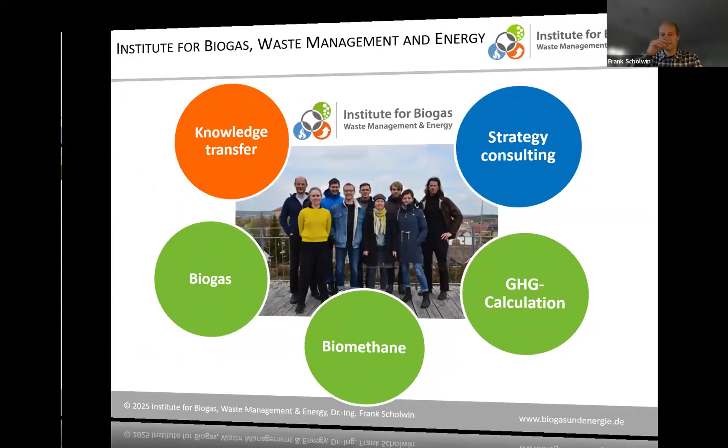Yes, thank you very much. I will share my screen for you because I have prepared some slides, and it's a pleasure for me to contribute to your workshop series with some of my knowledge. I hope that everything will be well understandable for you, because I'm not a native English speaker, but I will give my very best today.

I will give you some insight into the biogas process and technology, with the background that we can use it for utilizing organic wastes, organic residues, and produce energy out of that. This is something where we have a lot of experience and where I have been working for more than, what is it now, almost 25 years.

I am working here, as you have heard in the introduction. With my 11 colleagues, I'm working especially for biogas plant operators, helping them with all technical issues, with questions for strategy development for new plants and existing plants, and we calculate greenhouse gas emissions for them.

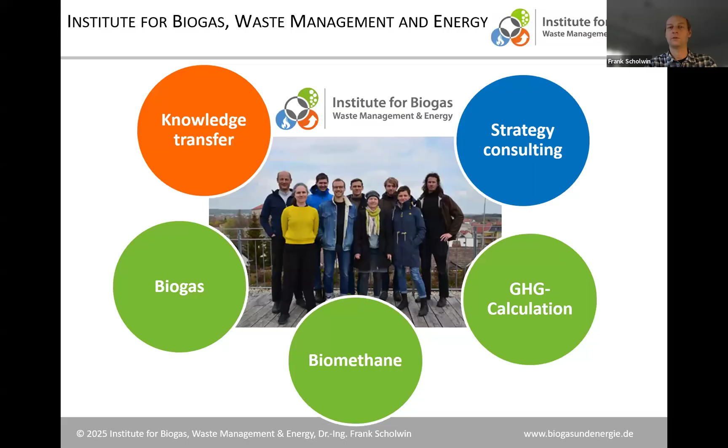So there is a very deep knowledge base about biogas where I want to try to give some insights for you all, what that means. If you have questions, please share them in written form, I think it's the easiest way. Before each of the breaks, I will give the floor for discussion, just to answer your questions and take up probably some of your thoughts.

Because, just to be honest, I'm mainly working in Europe. I have seen plants also in South America and Asia, but the focus of our work is Europe, and I know that the conditions here are sometimes very different compared with conditions in other countries and other regions of the world. But the technical processes and the biological process for sure are the same everywhere, so I am convinced about that at least.

What is biogas? Just starting with that, because my lecture today will be on the basics. I hope that you will not be disappointed because you know everything already, but that's how we designed this presentation, to start with the basics, and probably go into some deeper questions also within the questions you have.

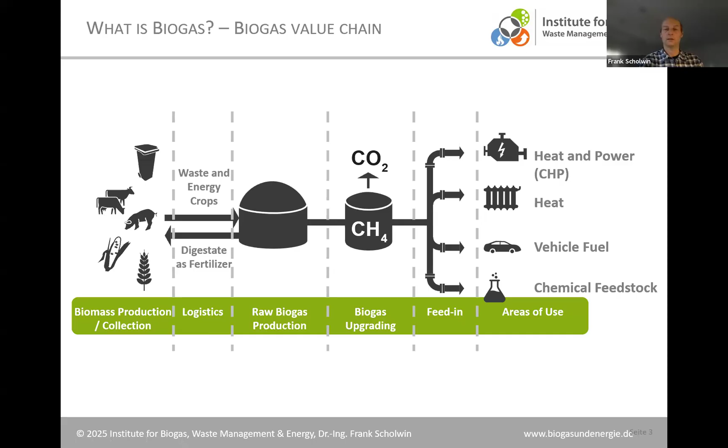And that's what I want to speak about for the next 2.5 hours, something like that. But that's the overall picture of what we will speak about.

When you want to investigate that a bit more in pictures and movies, there's a lot available on YouTube. There I think it's a very good overview which you can also get from the European Biogas Association. When you click the link - I will not do that now - you can watch a video of how the process is organized and what the basics of the process are.

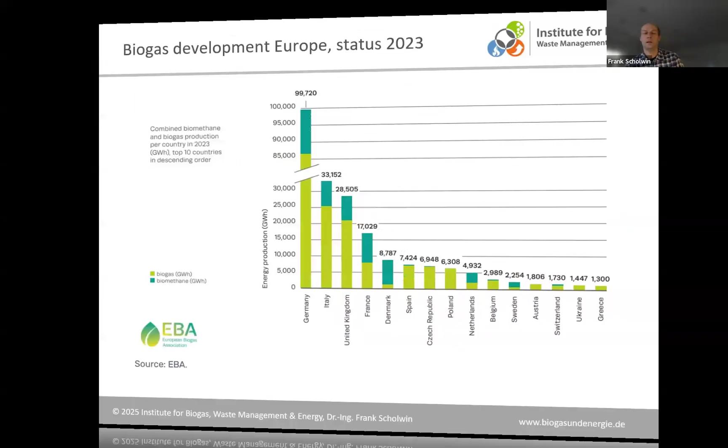I can only encourage you to look at a lot of videos, some painted like this one, highlighting the main points, but there are also a lot of videos about practical plants, so you get an impression of how the process looks in practice in different sizes. That's something I want to skip, but you will get the slides and can use this link. As a first part, I want to speak a bit about the development of biogas production.

What did we achieve until today, and when did it start? Not into the very deep history of biogas production - then we would go into wetlands. In wetlands the process practically takes place, and it also practically takes place in a cow's stomach, where these so-called anaerobic microorganisms are also active.

But I want to look a bit more at the industrial history. It's more or less 120 years ago that the first inventors saw, oh, that's a process we can make use of. In India, for example, street lighting was processed with gas, and that gas was produced from sewage sludge around 100 to 110 years ago. But today we are speaking about more industrial-like plants.

Here you see, when we only focus on Europe, where do we have most biogas production? That's a unit of energy production - how much biomethane and biogas is produced in the different countries, in the status of 2023. That increased a bit again, but the general picture is the same today. Italy and France will more or less in the near future overtake Germany, but still it's the highest biogas production in Germany.

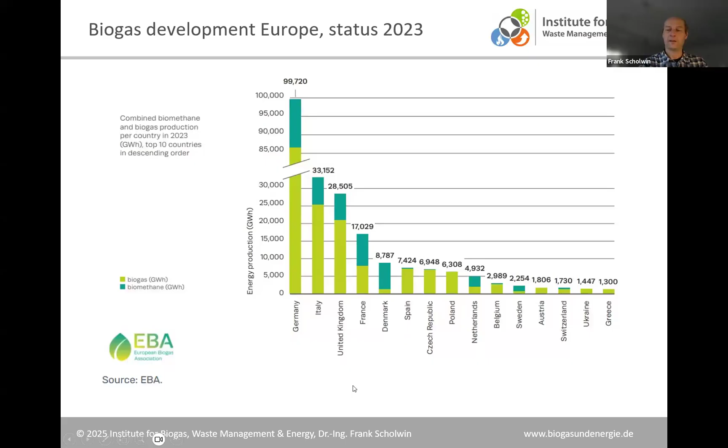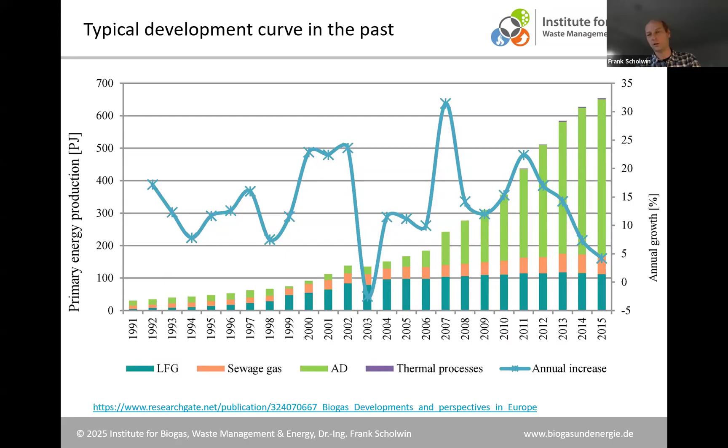And therefore it needs some type of incentives, and there are a lot of different incentives which are possible. When we see investments into biogas production, it's important to have some incentives. That can be tax reductions, direct incentives and money coming to the producers, in very different ways.

That's probably some numbers for introduction. In Germany alone we have around 10,000 biogas plants, which is probably nothing compared with India or China. But in those countries we have a very huge number of very small family-sized biogas production units, whereas in Germany the biogas production is typically more industrial scale -- there's no family-sized biogas plant.

It's all industrial technology with a larger scale. The smallest biogas plants we see use around 5,000 tons of manure per year, or 5,000 cubic meters of manure per year, and that's clearly not family sized.

On the international level, we have in Europe the highest numbers, but it's not necessary to have them here -- it's probably also connected with incentives we had in the past, because the advantages from biogas production are more or less the same everywhere in the world, and the substrates, the biomass we can use for the biogas production process, are more or less available everywhere, not only in Europe. Therefore I have collected a bit the advantages related to biogas production.

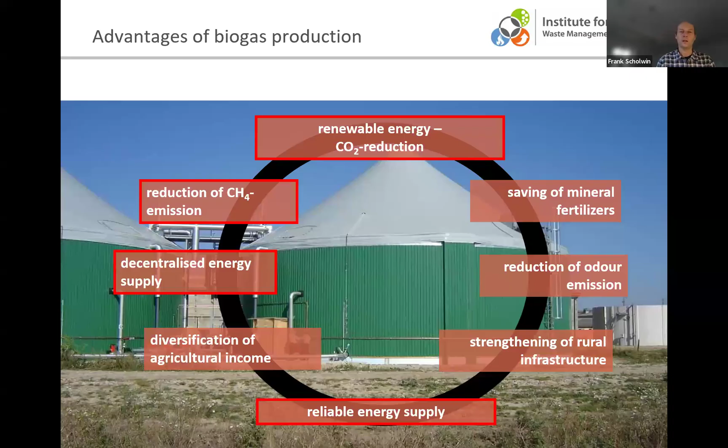So, leaving these general questions around the biogas process here, I will move on to more details of the process, starting with the biological process. But I will give you the floor if there are some questions, just raise them. I will leave this topic now and take a short break.

There is a question in the chat, I think from the second or third slide, about the typical development curve you showed us. The question is: why is the production of LFG almost the same after the year 2004? Does it indicate a limitation of production, or is it related to sustainable production of the LFG?

That's a very typical European question, because in Europe we had the introduction of the so-called landfill directive, around 2004 or 2005, on the 1st of June 2005, which banned the landfilling of organic waste in all European member countries. After 2005 there were more or less no incentives to extract more landfill gas, because no organics came into the landfills afterwards. Therefore we have this flat curve, because more or less all larger landfills already had a landfill gas collection system before, and only very few were installed afterwards. After that act, the focus of companies building landfill gas solutions shifted always outside European Union countries.

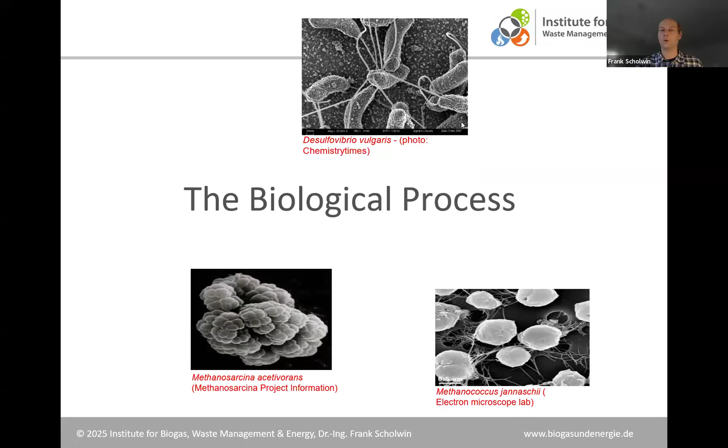I will switch to the slides again, but let me give a small answer to this question, because I cannot really explain the IPCC model, how it works, and I don't know if there's an open source model. I assume not, because they try to earn money with their work. That's my impression, and that's a good question, but I have to leave it open.

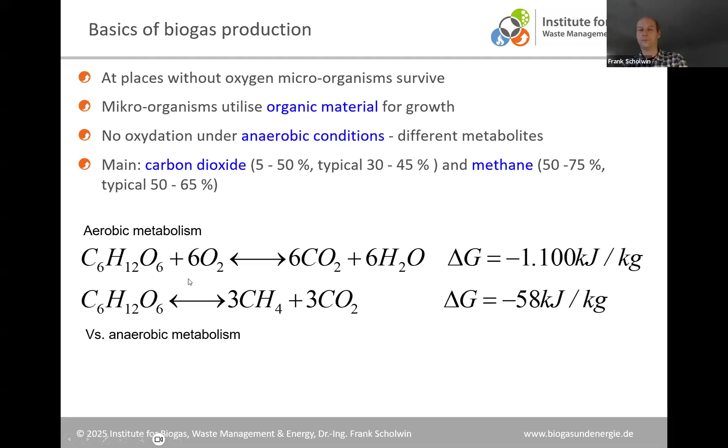So moving forward, the microorganisms - these are the conditions you have to realize as the engineer for the plant. You have to keep in mind that the microorganisms are your employees finally, and you have to create the best conditions for them so they like to work for you. They don't get paid, but they need to have fun working. They need certain conditions, and these conditions are collected here.

They need water, so at least 50% water in the process, and that's just dry. They also like it when it's liquid. It must be anaerobic.

Many of the microorganisms are strict anaerobic, so that means if there are some traces of oxygen available, then they stop working. Therefore, we have to keep the microorganisms in a covered tank, some kind of tank.

They like it to be warm. That means they need temperatures anywhere between 38 degrees Celsius, like our stomach, for example, or the cow's stomach, up to 55 degrees, sometimes a bit higher, but that's the range where they like to work.

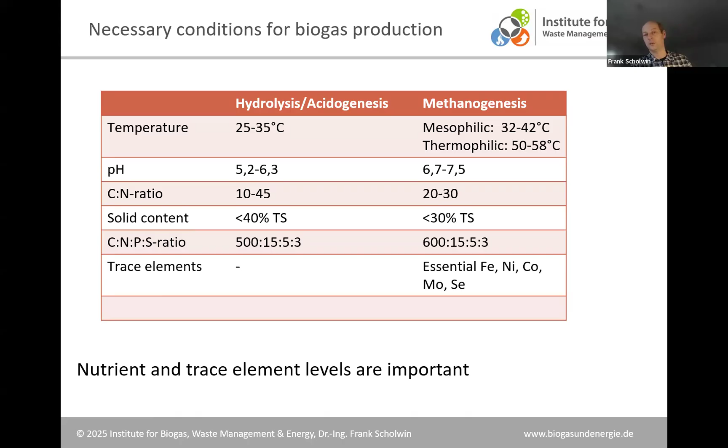Then there are some conditions which will result in an inhibition of the biological process, and that's availability of oxygen, what I sometimes told now.

But then it's also hydrogen sulfide, H2S. If we have too much H2S in the solution, that will inhibit the microorganisms from working. Therefore, the H2S must get out of the process, or sometimes you have to add additives to reduce the H2S concentration in the liquid in a biogas plant. Then volatile fatty acids, they are produced in the so-called acidification process, the first step of degradation.

And if they increase over this limit of around 2000 milligram per liter, then the methanogenic bacteria reduce their speed and their working time, and therefore the biogas production will be reduced. So we have to take a look on that, and there are some laboratory analyses you can do on site at a biogas plant.

That's possible. The same with ammonium nitrogen, where we also have to take a look. That's, for example, a challenge when we only have chicken manure. Chicken manure contains very much nitrogen, and when we want to process chicken manure only in a biogas plant, it's more or less impossible because you have very, very high ammonia levels in the process. Then you need some additional technology to take out the ammonium from the process, to reduce it below 3.5 gram per liter NH4.

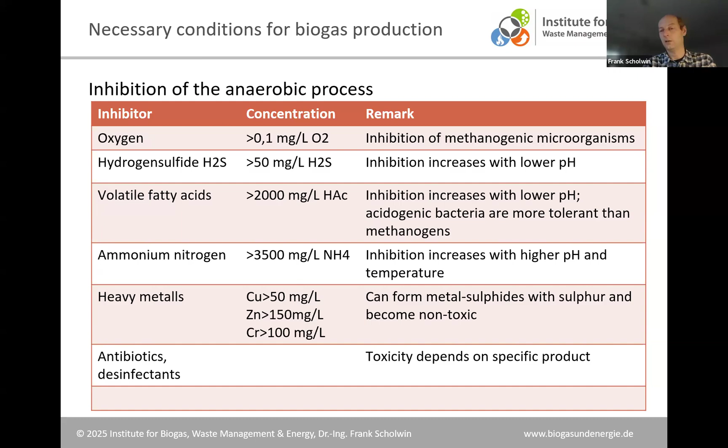Then we have some heavy metals, which can damage the microorganisms, and additionally antibiotics and disinfectants. So that's to be considered when you should be one day operator of a biogas plant, and then it could get important for you.

And then we have two other factors which are also important for the final design of a biogas plant, of the digesters, the tanks of a biogas plant. There's the so-called hydraulic retention time and the organic loading rate. I will only touch on these two factors today, which impact the behavior of the microorganisms, because the microorganisms need time to duplicate.

They need to get more and more into your process, and they need time for that - at least 14 days, I would say. If you have a process where the so-called retention time is less than 14 days, then you will wash out the microorganisms, and finally you will have no microorganisms, or very few, back in your system. The retention time means how long it takes for a piece of substrate coming into the biogas plant to come out again on the other side.

That's impacted by a lot of factors - just what hydraulic retention time do you choose? It's dependent on how degradable the input material is, what you use in the biogas process, and what kind of digester type you use. I'll come to that a bit later.

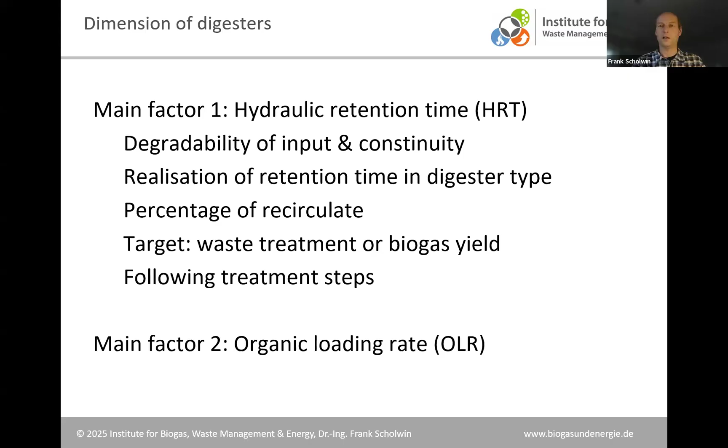That's probably some issues regarding dimensioning of fermenters and some typical times here. Typical retention times is when we have a so-called discontinuous process, that means, or plug flow as we say, that a substrate comes into a fermenter and then it stays controlled for a dedicated time in the fermenter or digester. And then it needs typically 21 days at least in the fermenter.

But when we have a CSTR, that means completely stirred tank reactor - a reactor that is totally mixed and continuously fed, every day feeding or every hour feeding, and every hour some digestate comes out. Then you have always a full mixed system, and you have always the challenge that fresh material will more or less directly leave the digester again. Therefore, in this type of plant, we need a longer retention time, typically between 30 and 100 days.

So if 1 cubic meter of substrate comes into the digester, we need a volume between 30 and 100 cubic meters that we can guarantee with 30 to 100 days retention time.

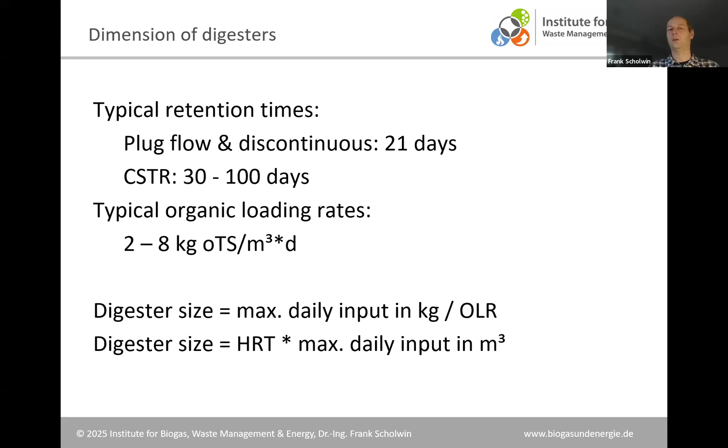And typical organic loading rates, we always calculate with the organic dry matter, ODM. There we have 2 to 8 kilogram organic dry matter per cubic meter digester volume and day in the feeding, and that works quite well. Out of these numbers, we can calculate the necessary digester size, and out of the digester size, finally, it results the investment - what does it cost to build this biogas plant. So we have this relationship here for the digesters.

And then I make a switch to what comes out of the plant. I mentioned it earlier - we speak about methane and carbon dioxide mainly. Methane is what we need for energy purposes because methane is burning. Natural gas is typically consisting of 97 to 99% methane, with some other trace gases, but mainly it's methane, and that's what we can substitute with biogas.

But what we additionally have, besides methane and carbon dioxide, is water vapor, because the process is typically 38, 40 degrees, something like that. Therefore, water is evaporating in the system, and that's something we have in the gas. Therefore, we have typically very much condensate in the piping systems for biogas, and then we need some technology to separate the condensate.

Then we have hydrogen sulfide, because sulfur is always contained as a trace element in the substrates. Typically we have concentrations in a very wide range, between 20 and 20,000 ppm, so up to 2% of the gas. That depends really on how much sulfur is in the substrates. We have very much hydrogen sulfide, for example, from chicken manure or from pressed or squeezed rape seeds - there's a lot of sulfur inside.

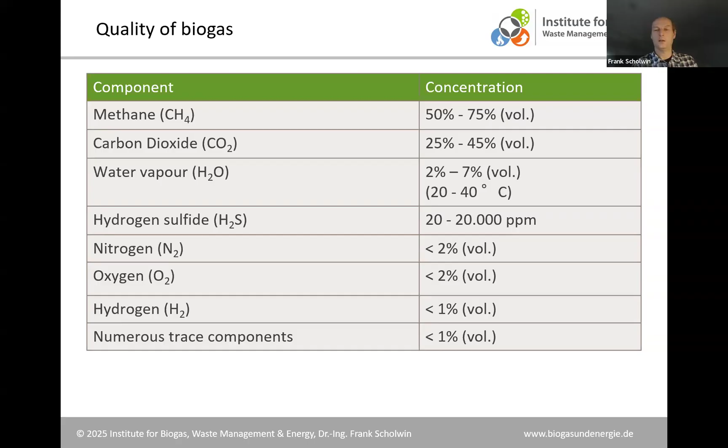So finally, with the substrates we use, we define the composition of the biogas. That's very clearly related and can be finally also calculated. And then, after a break which I would take soon, I would come to the questions of which kinds of substrates we can convert and how we can calculate the amount of biogas.

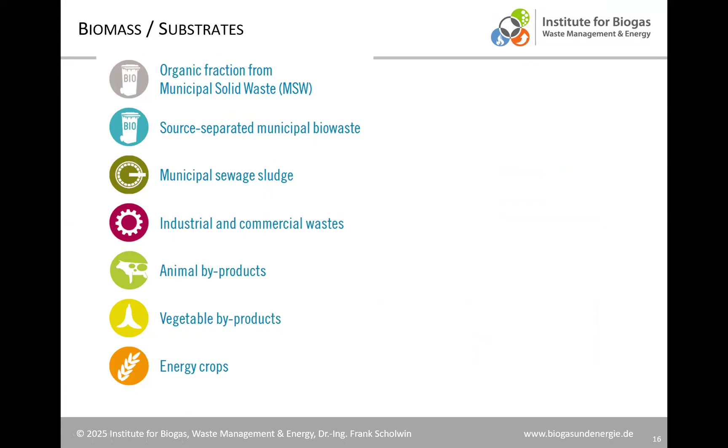Now it's a question of what kind of biomass can really be used and what percentage of biomass will finally be converted into biogas. There's a very long, more or less unlimited list of possible substrates which can be used, starting with the organic fraction from municipal solid waste, or source separated municipal bio waste, industrial wastes, sewage sludge - it's very common. Commercial wastes from food industry, for example - almost every food industry has wastes which can be used for biogas production.

Then there's a lot of animal byproducts - manure, straw, bedding from the cows, everything coming out of that. Then vegetable byproducts - things that are leftovers from processing food, for example. And finally, last but not least, I would say, energy crops.

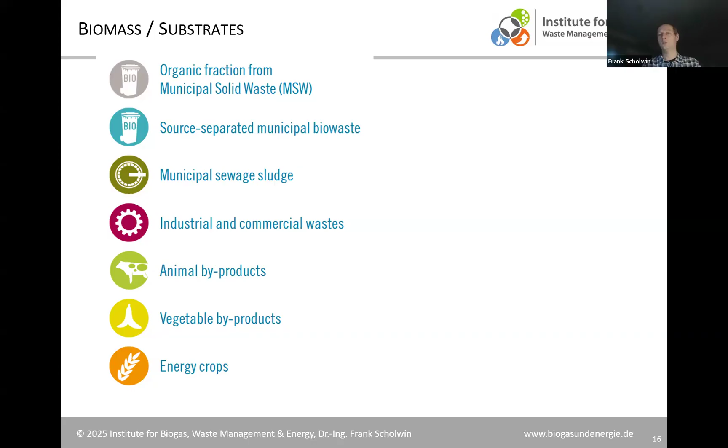Energy crops are used to a very large extent in Germany, and they can be used, especially when they are ensilaged, just to fill gaps when there's not enough other organic material available, so that you have a continuous production of biogas in your plant. That's just a short overview, with some pictures of how it could look like.

One example here you see is more or less wood waste. Wood waste is not possible - the anaerobic microorganisms are not able to eat wood, so wood chips are also not possible to be converted. That's a limitation.

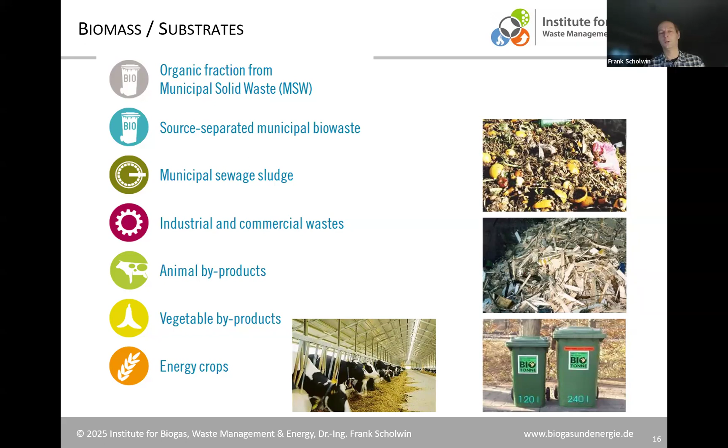When you want to analyze that, you can dry your material in an oven at 105 degrees, for example, until you have a constant weight. Then you can evaporate the water, and from the weight difference in your oven, you can measure how much water was inside. Then you can put the rest of the material into an oven at, I'm not really sure, 700 degrees, something like that.

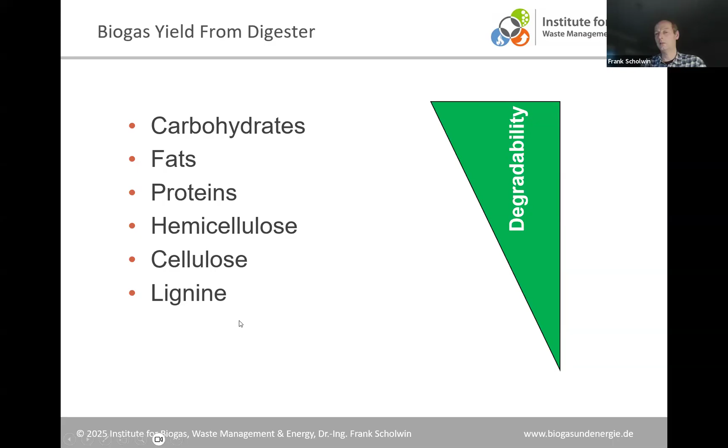There are some specific questions around municipal solid waste, because we cannot easily take a number from a table, as it's very, very dependent especially on the percentage of the organic fraction in the waste. Worldwide we see very different numbers for the organic fraction of waste. Sometimes people have composting close to their houses, so we have very few amounts of organic fraction in the waste. Sometimes they live in the center of town and put everything organic into their waste bin, so the percentage is quite large.

Then we have some seasonality, which depends a bit on the climate where you are located. For Middle Europe, we have very strong differences between winter and summer - summer when people are in the garden producing their own vegetables, winter when nothing is growing. Or you have very dry and rainy seasons, with very clear differences, including differences in quality, not only in amount, but also in quality of the waste you collect.

And it's also always a changing composition of the organic fraction. Sometimes it's much wood inside, or from gardening material. Sometimes it's only food waste.

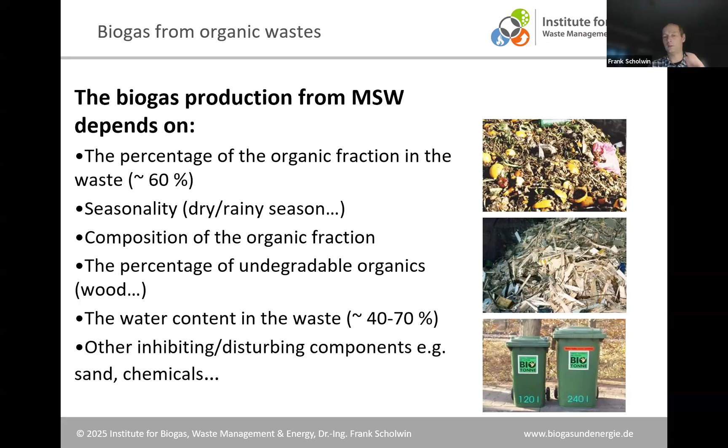And then it's also changing water concentrations and some other disturbing components that you have to consider when you are making a plan for a digestion plant for organic waste. That's something I only wanted to put your attention on here.

Now I will make a small calculation example with you so you get an idea how to calculate how much biogas can be produced from a dedicated amount of substrate. I take two examples, one organic waste example and one cattle manure example, and I take quite large numbers, just for a larger town, I would say, with 500,000 inhabitants.

Then you can expect around 50,000 tons per year of source separated organic waste. When I'm just looking at Germany, it's like close to Leipzig or Dresden. These towns will have such an amount of organic waste.

Then as a second example, I have cattle manure, where I take 10,000 tons per year. That's not so much. That's from, for example, 500 cattle at one stable or one location. So it's much less.

And then we have different numbers of fresh matter concentration. So in organic waste, that's only an assumption - it will be locally different, but just for a calculation, we have 40% dry matter, and the volatile solids, so the organic dry matter, is 50% of the solids. And so we can calculate that out of 50,000 tons per year waste volume we get 20,000 tons dry matter, and half of that is organic dry matter, what can be converted to biogas.

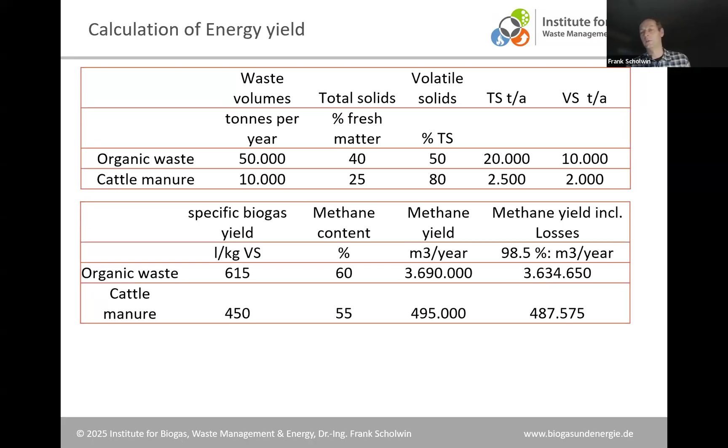And out of the cattle manure, because we have much less organic matter and much less specific biogas yield and less methane concentration, we only have 500,000 cubic meters methane per year. And then there are typically some losses in the process, which we calculate typically with 1 to 1.5%. That must also be considered. Then we result in these numbers here on the right-hand side.

And then we have to think about what we will do with that. Typically, you don't sell the methane - it's also possible, yeah, but typically you need some energy, and that can be electricity, that can be heat, or it can be gas to substitute natural gas. That's what I put here in the lower lines.

So we have in these gas amounts here the energy yield, lower heating value, shown as megawatt hours per year total. Here we have that's around factor 10, yeah, factor 9.97 is the correct factor. Then we have 36,000 megawatt hours out of the organic waste, or around 5,000 megawatt hours out of the cattle manure.

And when we produce electricity, we have typically 40% efficiency. Then we can have here 14.5 thousand megawatt hours electricity, or only 2,000 megawatt hours electricity in the cattle manure case.

And when we produce electricity, typically we produce electricity and heat. So in a motor, the biogas is processed in the motor - I'll come to that later. There's always some waste heat, and then we have around the same numbers of heat that we produce.

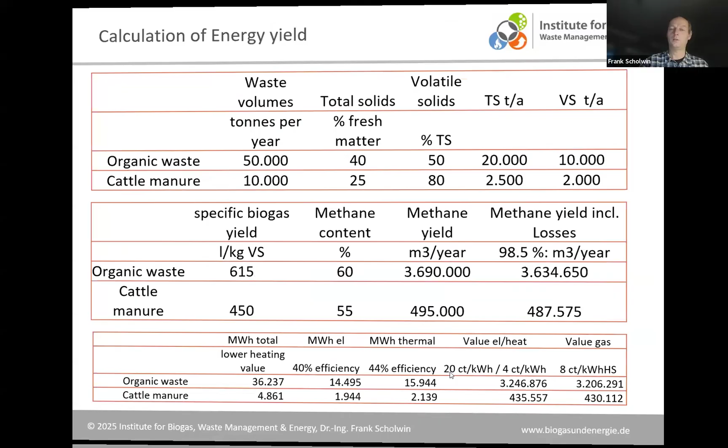If we sell the gas instead, to substitute natural gas, which is possible when you have a gas grid where you could inject the gas, then it's around the same numbers. The final economy depends on these individual numbers: the 20 cents or 4 cents for heat, 20 cents for electricity, or 8 cents for the gas you sell. Then you need an optimization of what you can sell at that location, depending on the energy produced there.

So that was quite fast, and I would open the floor if you have some questions. I see there are a few questions in the chat. It's more of a comment, so I'll start with the first question, including some elaboration.

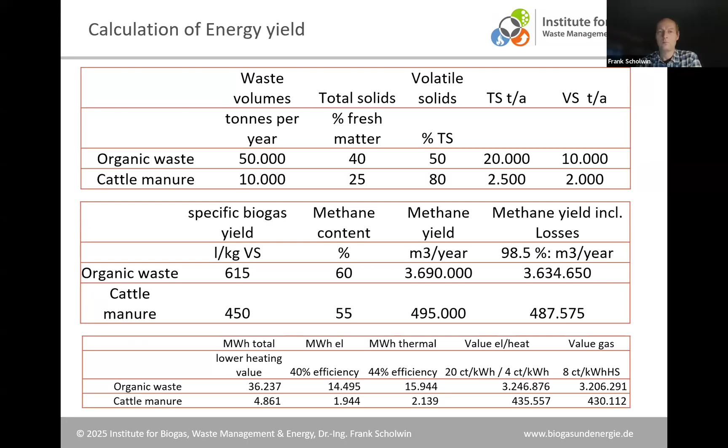The total solids based on fresh material, volatile solids, and also information like specific biogas yield, methane yield, and lower heating value - these we can find in resources on the internet. So for clarification, in each of these slides, or in this table here, you will have that available, but such tables you can also find on the internet.

Do you suggest any specific source that has better international data? I know there is a very good database for German-specific data in Germany, but is there any dataset or source for the rest of the world that people can look into? Very good question - I am not aware of that because I only use the German ones, and I cannot suggest a good international site or web page where you can look for that.

Another possibility is to do sampling and check it in the lab to see how much volatile solid and organic waste there is, and so on. Yes, but you need a lab that is able to produce these numbers. In Central Europe it's very easy to find laboratories, but I know in some other countries there are not so many specialized laboratories. It's also an option for industrial substrates that don't really fit in such a table - then it's probably best to check the biogas potential of that individual substrate in the laboratory. I know people from some other countries send their samples to laboratories in Europe or Sweden to check the potential.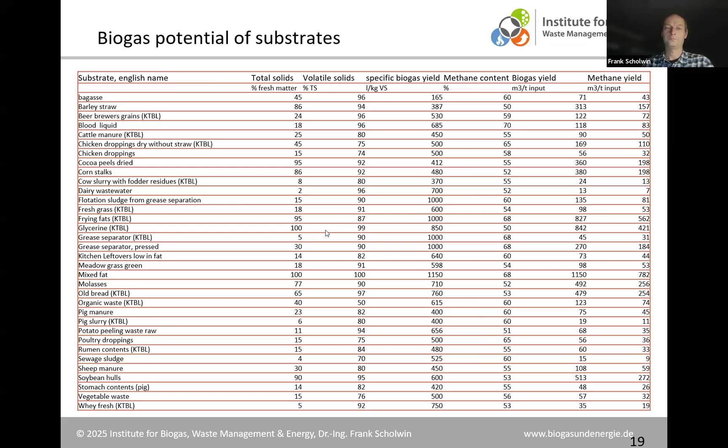Okay, then I would proceed with the technological process. What you see here, I will go through the process from the beginning to the end, more or less.

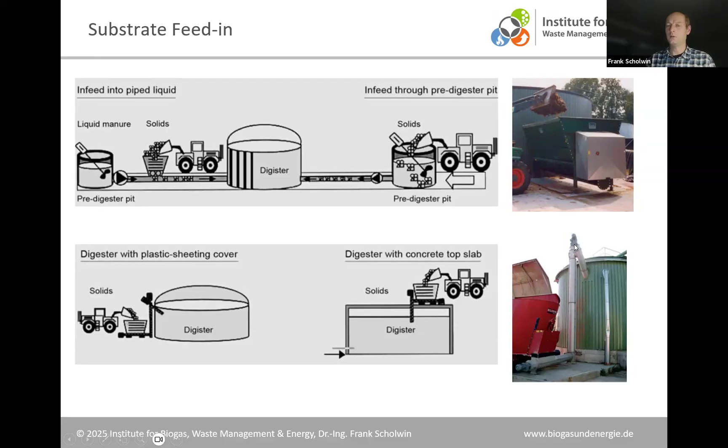Sometimes it comes underground, as in the upper picture, or it comes over the surface, where solid material is fed into a feeder and screws transport the material over the surface, coming from above into the digester, or the digester is underground and fed directly from upstairs. Some different methods - on the right-hand side upper picture, solid material is fed with a screw going directly into the digester behind the feeder. In the lower part, you see a system of screws transporting the material upstairs and then downstairs again into the digester.

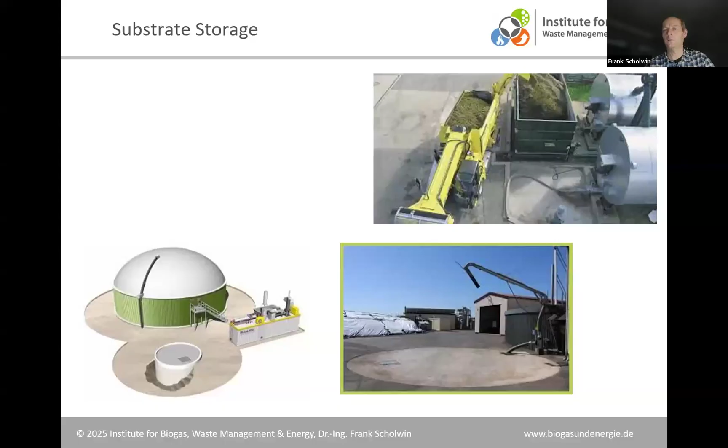When the process is getting wetter, with less dry matter concentration, then it's possible to mix it totally, like in a mixer when you are preparing a smoothie or something like that. The material is coming in on one side, leaving on the other side, but in between it's totally mixed. And that's very liquid.

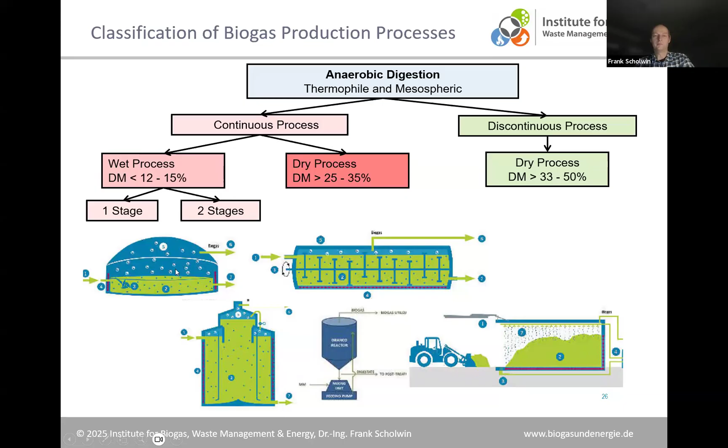There are very many different technologies available, what I will not speak about in detail today - just giving you an insight and an overview of what technologies we have. And now some pictures, just that you can see how it looks like.

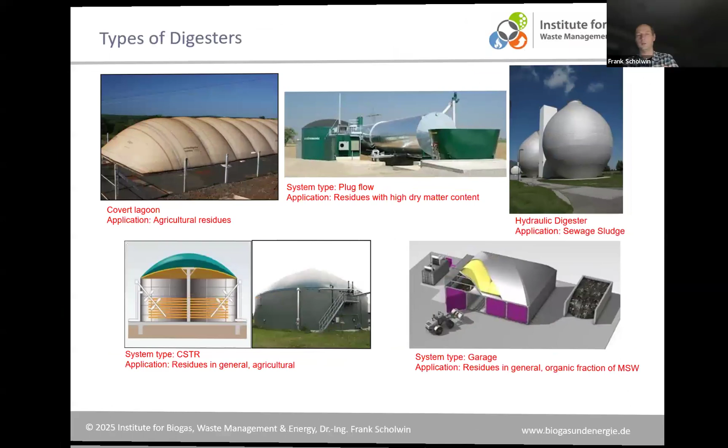A biogas plant can be a lagoon, what we have seen often in South America, where we have a gas-tight cover on the ground. Here it's more or less dug into the ground and sealed with some foils or with concrete - there are different options. And then there are mixers inside.

Then we have this plug flow fermenter, like you have seen also earlier, where the material is fed on one side, taken out on the other side. Then there are digesters which are optimized for hydraulic mixing, what you see only in sewage sludge plants, in wastewater treatment plants.

This is a very, very special form, like an egg, so you have no dead zones of mixing, what you always have in these other fermenters. The typical system you would see in Germany is a complete stirred tank reactor, where we have mixers inside, and a tank where the material is continuously fed, more or less every day or every hour.

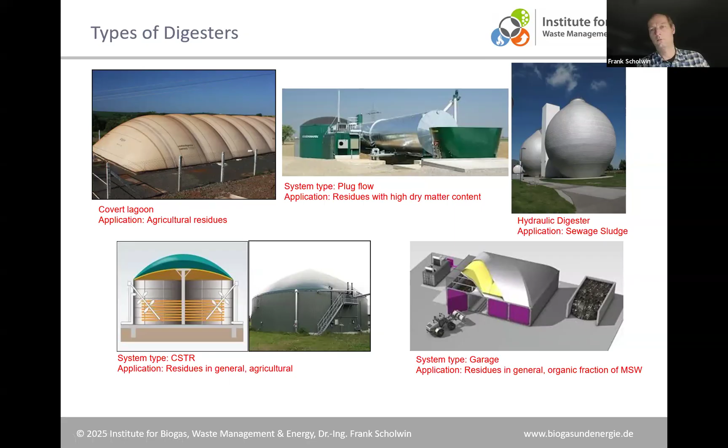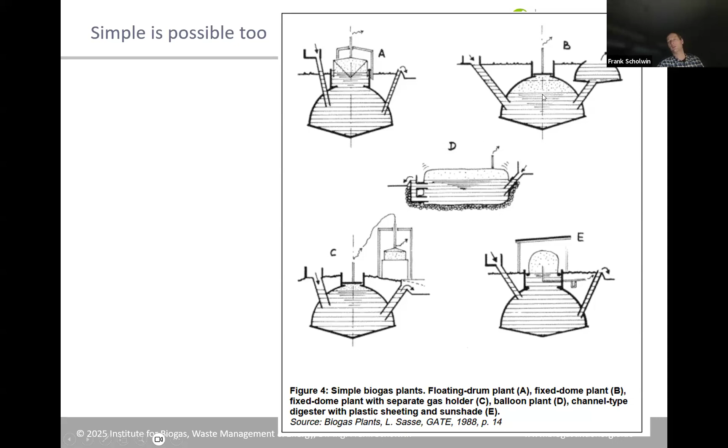But it's only working in very hot climates, because the process, what you have learned earlier, needs some temperature to have a good running process - 30 degrees, more than 30 degrees, what you hardly can realize in these systems here. And when we are coming to a climate zone which is colder in winter, then these plants will not work in winter.

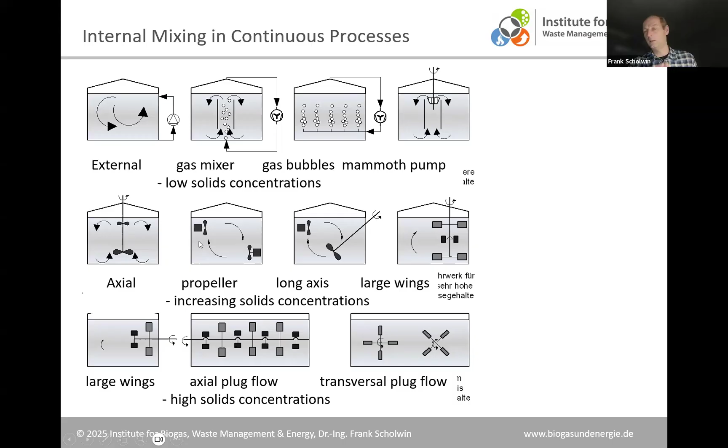You can also use a pump outside, so then you have no mixers inside, which is good for maintenance. And you can also mix the digester inside. That's a lot of options for how you can do that.

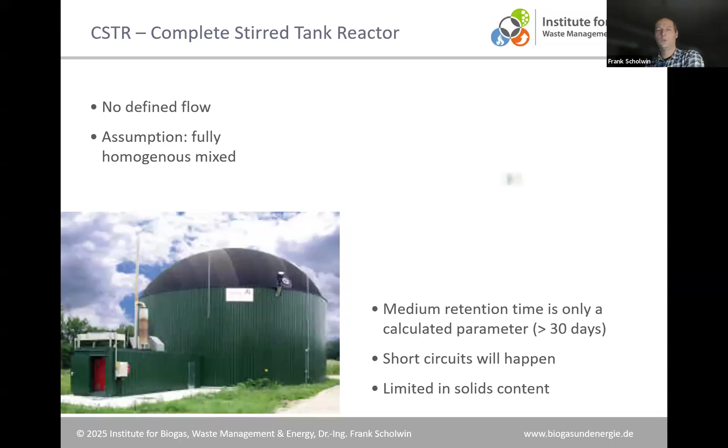I think some pictures are coming which will add some views, but I will skip these. That's because we are speaking mainly on municipal solid waste here in this workshop series.

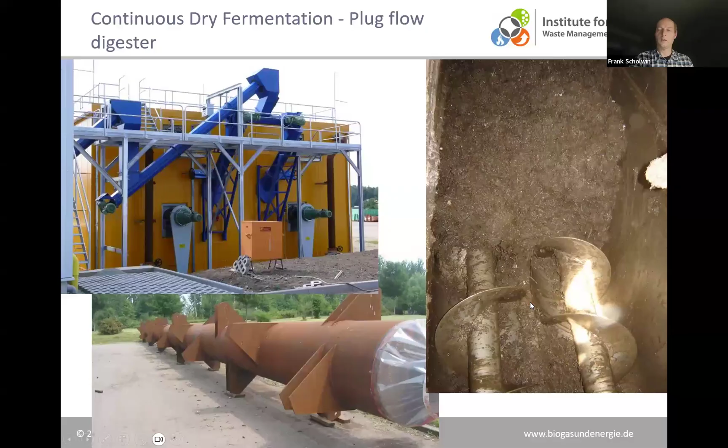Yes, that's more or less the same, and I would skip these. So everything is possible in large scale.

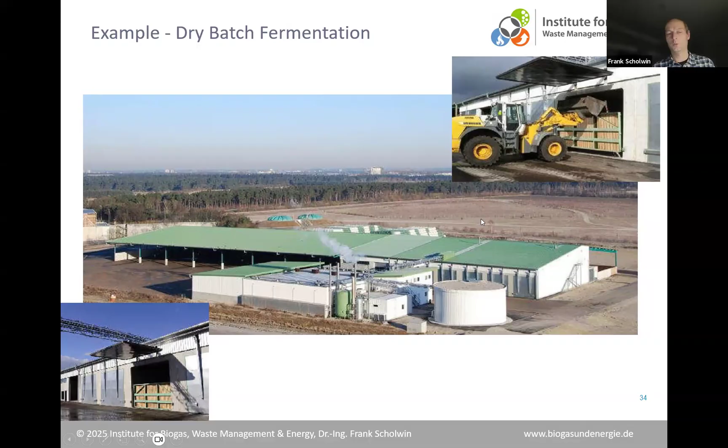So one is filled and the others are under the digestion process. If the digestion process ends in one of the others, they take the material out and fill it with new material. That's how these systems work.

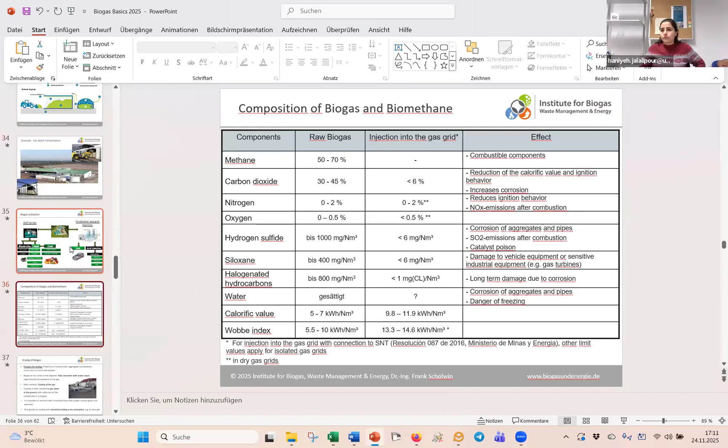So I think we can proceed. Okay, so now I will come to the last part, when the biogas is produced, and I tried to explain you the technology and the process until this point. Then it's the question, what should we do with the gas?

There are some options, I mentioned them in the beginning. One very typical case in most regions of the world is just to produce electricity and heat on site of the biogas plant, in typical gas engines or ignition oil engines, where we can cover local demand of electricity and heat, or bring the electricity into the local or larger electricity grid. In the case that we don't need the heat, it's possible to produce cold, which is also necessary in many buildings and in some industrial cases. And if no electricity is produced on site, one option is also always to produce only heat - what I don't see in the regions of most of our participants here.

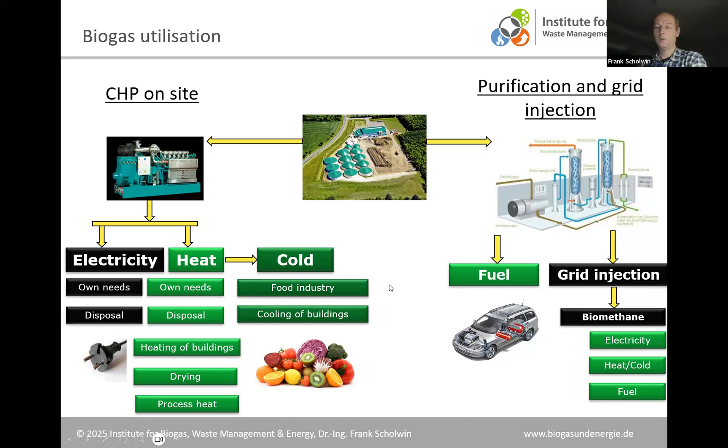But one option is always to purify the gas, to upgrade it to natural gas quality. That means to take out the carbon dioxide and use it as a fuel, or to inject it into a natural gas grid. This happens - I can only estimate 3,000 places in the whole world at the moment - and that's also a typical way how to use the biogas. I will explain some of these pathways a bit more in detail.

Here you see the composition of biogas and biomethane. Biomethane means the biogas that is upgraded to natural gas quality. In the biogas, we have a lot of methane, clearly. In the gas grid, that's more or less the limits - not a composition, but the limits when we want to inject the gas into the natural gas grid. For methane, there's clearly no limitation, but for carbon dioxide, we must reduce the concentration to lower than 6%. The nitrogen must be brought down typically to 2%.

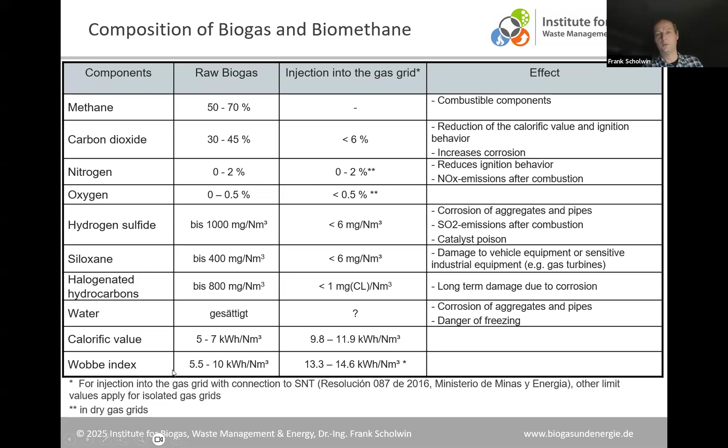The oxygen must be down to 0.5%, something like that. Hydrogen sulfide must be reduced very strongly, from typically one or a few thousand milligrams per cubic meter down to 6. We also have other components - siloxanes, hydrocarbons, water - that must be adapted and reduced. Then there's a difference in calorific value: raw biogas is 5 to 7 kilowatt hours per cubic meter, while natural gas is much higher due to the absence of carbon dioxide. The same applies to the so-called Wobbe index, a parameter of gas quality in natural gas grids. We need technologies to bridge this gap.

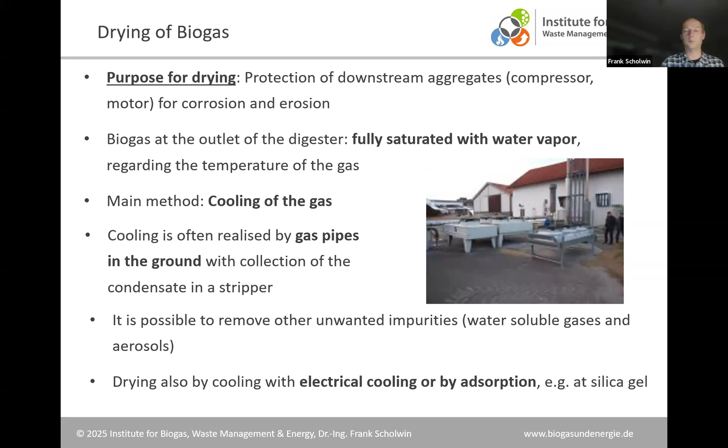The first step is always drying the biogas, because we have to protect all aggregates against corrosion. The biogas is saturated with water vapor, coming out of the digesters at around 48 degrees. Drying can be done by cooling the gas, producing condensate that separates the water from the gas. This is typically done with electrical cooling, but sometimes adsorption is also possible. It's a very important step.

The second step is removing H2S from the gas through desulfurization. There are many possibilities to do this. It can be done using microorganisms in the digester, where we add a small amount of oxygen into the gas phase of the digester - not the liquid phase, the gas phase. Microorganisms then convert H2S into sulfur, and everything gets yellow inside the digester.

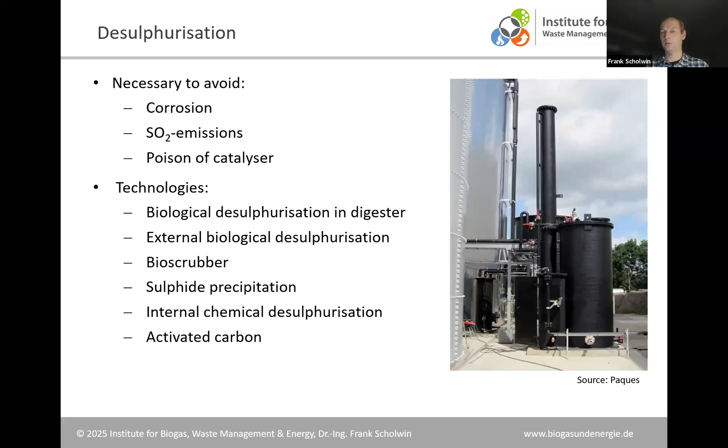This can also be done externally, like in the photo here, in so-called bioscrubbers. We can also use chemical pathways, or finally activated carbon, where the gas flows through activated carbon and the H2S binds to it - though this is typically the most expensive solution. Often a combination of different technologies is used.

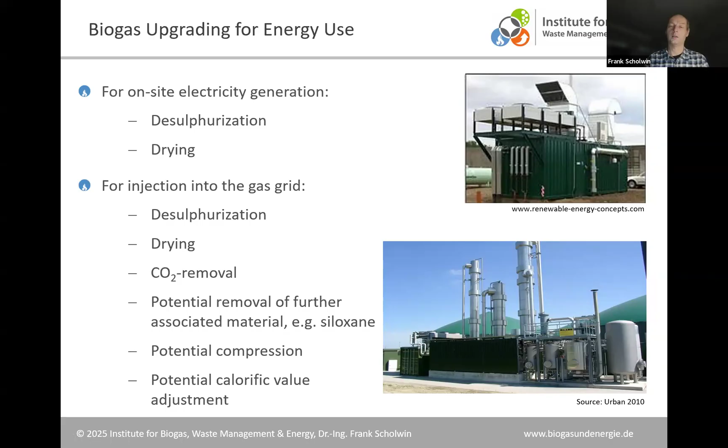When we want to produce on-site electricity, desulfurization and drying are still necessary just to protect the engines. But when we want to feed into the gas grid, we need further steps to remove the components shown in the table. Finally, we also need compression, because the gas must come at higher pressure than the gas already in the grid, otherwise it won't flow in. Out of the digester, we get gas at more or less zero pressure, while the gas grid typically operates at 4, 6, or 16 bars - so we have to compress the gas for that pathway.

There are many different technologies available for carbon dioxide removal - I can't go into all the details today, but they're visible everywhere in the world. What has emerged over recent years, and is I think the most important technology at the moment, is separation by membranes, using the effect that methane molecules have a different size compared to carbon dioxide molecules. Like a sieve, you can separate both types of molecules - only the holes must be very, very small. It's a well-working method.

There are also chemical and physical methods. For example, take a water bottle - when you shake it, you see the carbon dioxide inside, and when you open it, the pressure releases it. That's the same effect used in a water scrubber, where biogas is fed under pressure into the scrubber. The carbon dioxide dissolves in the water, and when you take the water out and decompress it, the carbon dioxide comes out in a second column, for example - so you can separate both gases.

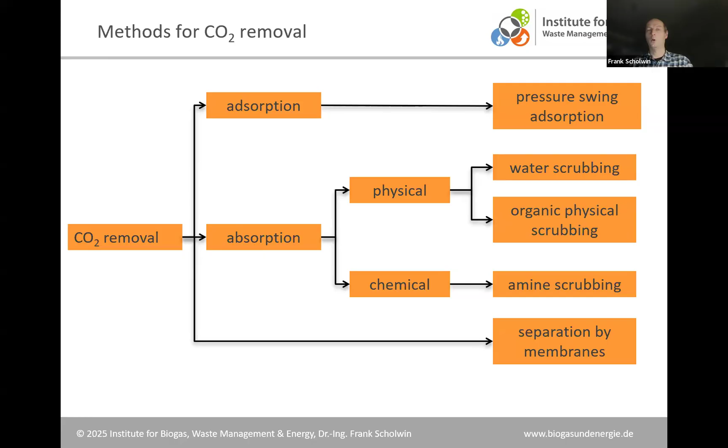And here you see the so-called membranes - very, very thin tubes with small holes inside, where the gas is pressed through under pressure. In a plant, there are a lot of these membrane modules - that's what you see in the violet picture here.

And inside you find these small spaghetti, we could say, but with holes inside. And from outside, it only looks like a container. You never know what is inside here.

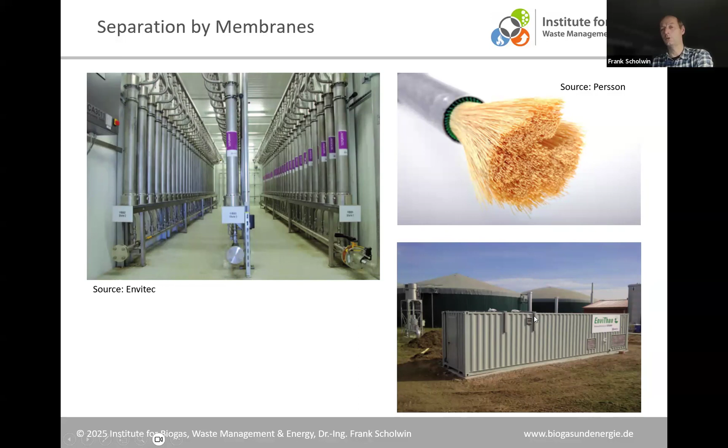So it's a quite practical solution also for transporting the technology to the place of the biogas plant. And when we have upgraded the gas to natural gas quality, the easiest way is to transport it through the gas grid if a gas grid is available, and that's not everywhere the case.

Yeah? And where that's not the case, it's possible also to transport the gas by trucks to, for example, fueling stations or to customers which want to use the gas. Or another option is to have a local fueling station, but then you need vehicles which run on CNG, compressed natural gas, and that's very different in different countries of the world.

So we have many CNG cars in South America, for example, in Central America. We have many in Italy, and we have not that many in many other regions of the world. And that's something what you have to check.

But it could, for example, make sense when you have a waste management plant with biogas production to make a cooperation with the local bus transport. And then the bus transport can be fueled. Then CNG buses are necessary, clearly. The bus transport can be fueled with the biogas what you have.

And there we have very good examples from Sweden, where there are towns which don't have a gas grid, but where most of the public transport is dependent on CNG and the locally produced biogas. That's examples how to use it.

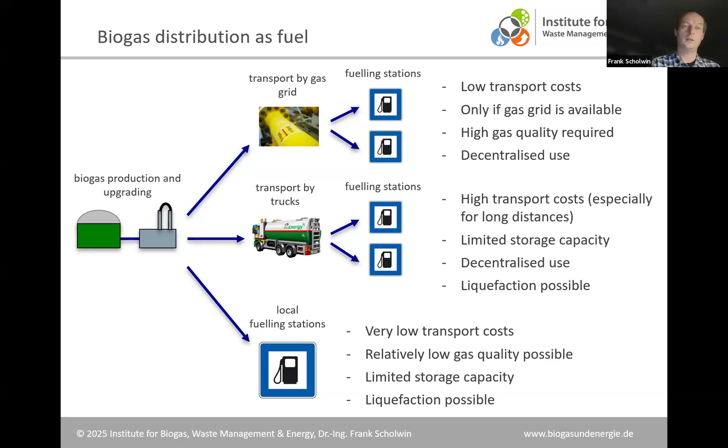From that point, I will come to give you a short overview about economy, because that's always a crucial point. And when you are working as engineers in the future, you have to make some feasibility calculations. Is it feasible to invest into a biogas plant or not? You will be asked for that, and then you have to make some calculations on that.

I don't have very much time today to spend on this topic, but I can give you a short overview of how you can make such a comparison. And when I take an example of biogas upgrading to natural gas quality here - typically, with investment and operation and supply of substrates, you have typical costs, and everything here on the screen is in euro cent per kilowatt hour.

Typical cost for the production of biogas, and then you have the raw biogas with carbon dioxide and methane inside. The cost is between 3 and 5 euro cent per kilowatt hour. To make it usable, you have to upgrade it to natural gas quality. Then investment and operation, electricity demand, everything necessary will cost between 1.5 and 2 euro cent per kilowatt hour, depending on the size of the plant. So in total, you have something between 4.5 to 7 euro cent per kilowatt hour production cost.

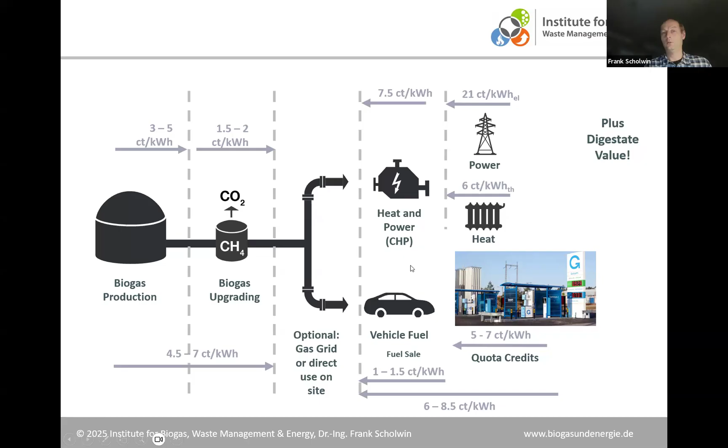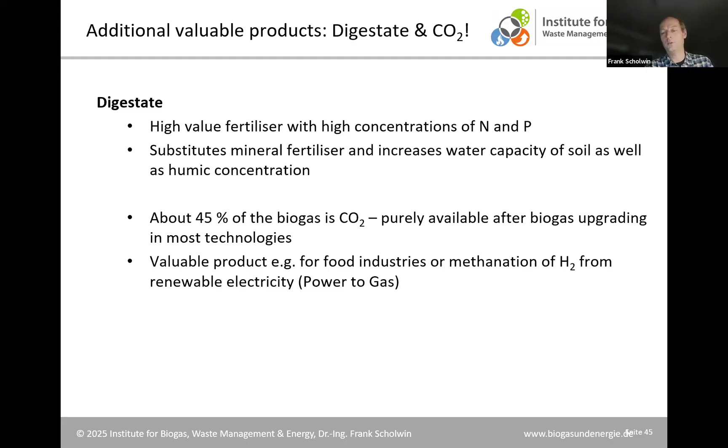That's very important, because just speaking about additional valuable products, that's the digestate. But it's also the carbon dioxide, and that's getting more and more important. When we have separated carbon dioxide from biogas upgrading, we have it typically in a very good quality. This can be very good used as product for food industries, or for production of methane from hydrogen with renewable electricity. So that's more and more asked for in the industry, and therefore it makes sense to think locally about whether we can use the carbon dioxide. Sometimes it's used for water, or beer or other beverages, and sometimes also for industrial purposes. So that's, from my point of view, very important to be considered for the whole economy.

I would like to give the floor to some questions, if there are some, because I would switch now again the topic a bit. And I see here one question: the difference between biogas and syngas.

That's a very good question, because that's always a question of names of different gases. Biogas is always coming from a biological process. Microorganisms have produced biogas, that means methane and carbon dioxide, from organic substances which are degraded by these microorganisms. Syngas is coming from a thermochemical process, called gasification. I don't know if you are aware of that, but it's like a shortened incineration process.

When you heat up solid biomass, typically wood, to 1100 degrees, then it will be converted into gas, and carbon will stay back. This gas is typically with a very different composition than biogas. There's also some methane, but only 10%, something like that. It's mainly carbon monoxide, and there's a lot of hydrogen inside. This gas can be produced under controlled conditions in a thermochemical process, and also this syngas can be converted into methane finally, but it needs very different technologies. So it's not covered with the name biogas, for sure.

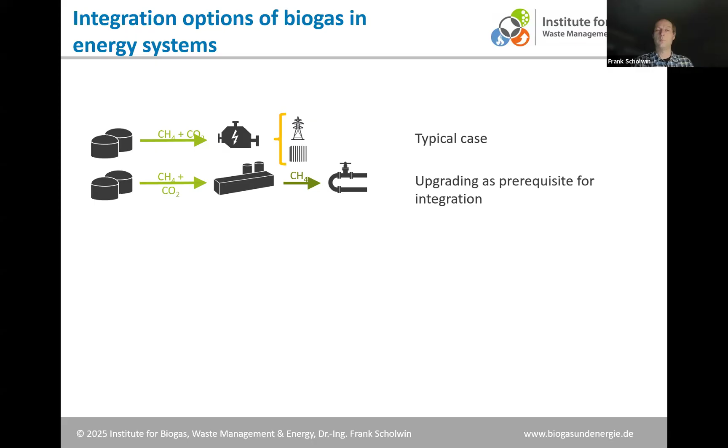Okay, then we are also with the question of industry or food industry carbon dioxide utilization at the point of how can we integrate biogas installations into the overall system. I will look first at the energy system. The typical case is production of biogas, production of electricity and heat, and that's it. That's the typical and traditional way how to use biogas. What came up, as I told you, where we have around 3,000 plants today on the market, is to upgrade the gas to natural gas quality and then use it as a substitute for natural gas. Then we can use it everywhere, in industry, in households, in municipalities, wherever, just to substitute natural gas, with the option to use the typical technologies which are built to consume natural gas.

Then we also have the chance to use the methane in the so-called reforming processes to produce hydrogen. That's a bit of a political question - more and more discussions are around we need hydrogen as the purest renewable energy. So it's possible, but we have to put additional energy into the process to supply hydrogen from biogas. It's important to know that it's possible, and I would put the economy in question, because why should hydrogen be better than methane to be used in the energy system? But there's a chance to add electricity into the process, and together with electricity it's possible.

I just have to check it here.

When we add electricity, we can produce hydrogen from electrolysis. When we mix hydrogen with biogas, we can get, through the biological process, some new fermenter designs that are necessary, but it's possible to add hydrogen to biogas, and the carbon dioxide in the biogas will be converted to additional methane. So in the best case we could double the methane output from a biogas plant when hydrogen is available. Looking into the future, more and more hydrogen will be available, and it's an option to use hydrogen for a good purpose. There's a lot of research and some first demonstration units on the market.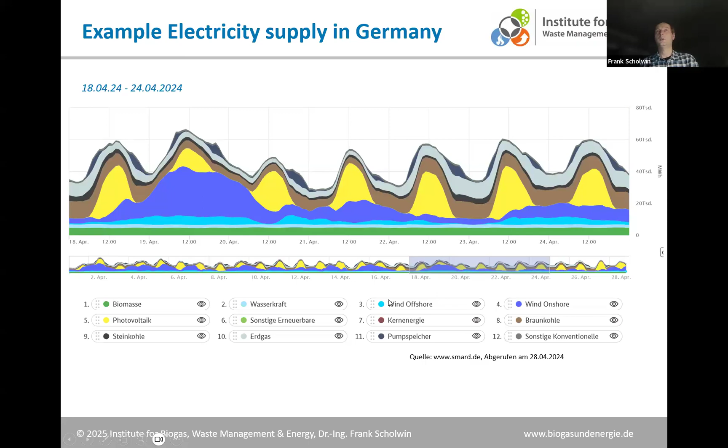But for that, it's necessary to increase the electrical capacity of individual biogas plants. Today we are producing electricity, I would say, in a flat line. If we want to produce much more during the day, at night, or in the evenings and mornings, we need additional electrical capacity for electricity production. This is something that is happening in practice in Germany - many investments are being made in that direction, but only based on governmental incentives enforcing it.

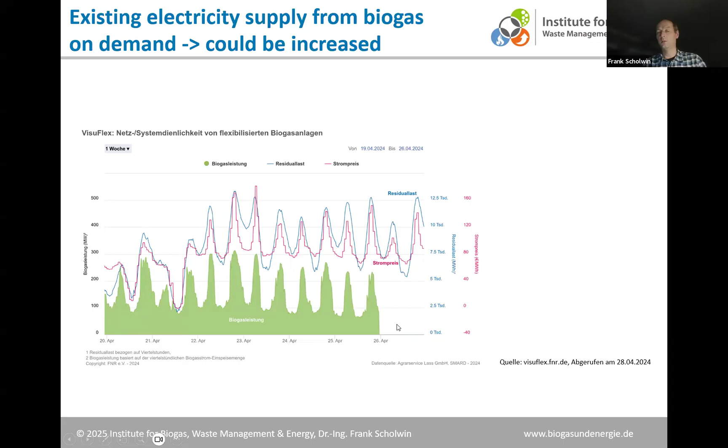It will be possible to reduce the necessary flexible load from fossil energy to around 50%. That's something looking a bit into the future, but it's one option for biogas energy to be better integrated into the overall energy system - just one example of how to do that.

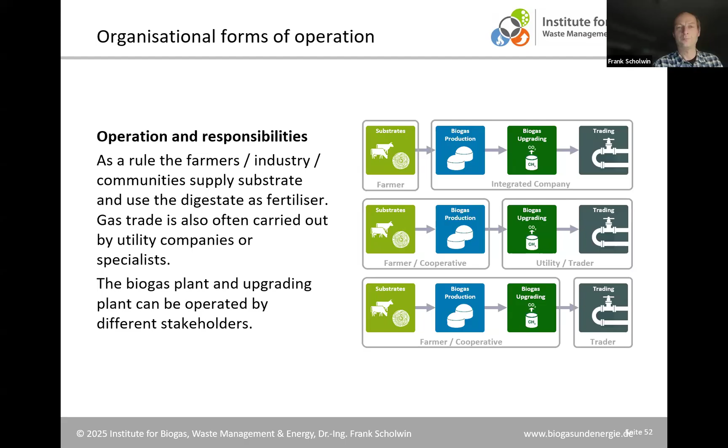So let's come to some short case studies that show how it could look like. This is an example from Norway, where I stood on top of one of these fermenters.

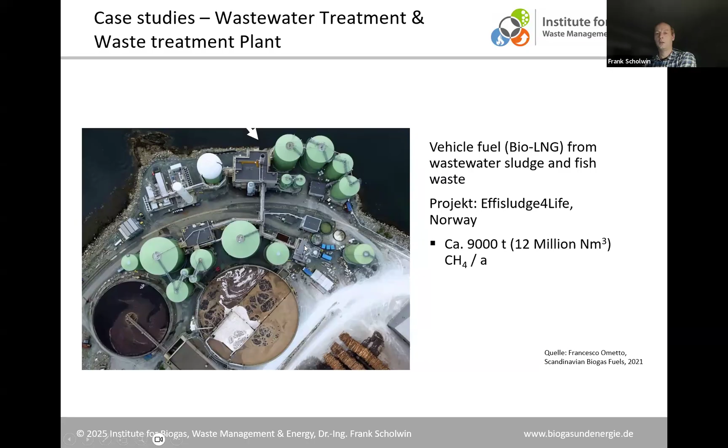It's a biogas plant located in a wood or paper mill. The wastewater of the paper mill and the sludges are used together with 40,000 tons of dead fish every year, coming from the salmon farms in Norway. They are digested, and finally bio-LNG is produced as vehicle fuel and fuel for ships. Here is a bio-LNG filling station, where it's transported away with trucks, because in Norway there are no gas grids where it could be used.

We have a farmers' cooperative in Germany, where 6 million cubic meters per year of biogas are produced. Altogether almost 100,000 tons per year of chicken manure, pig manure, and energy crops are used to produce biomethane, which is then injected into the gas grid.

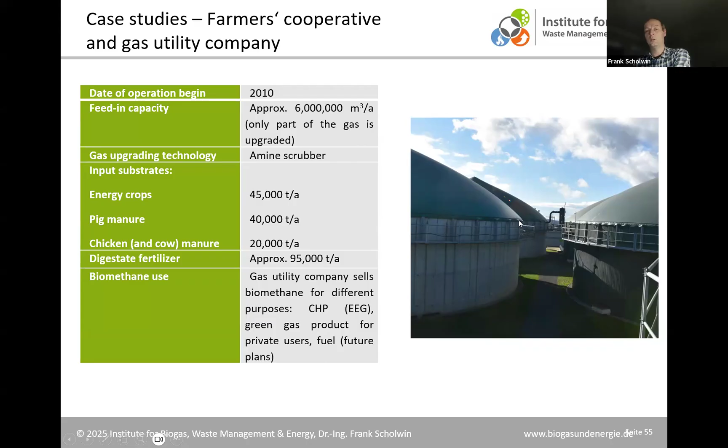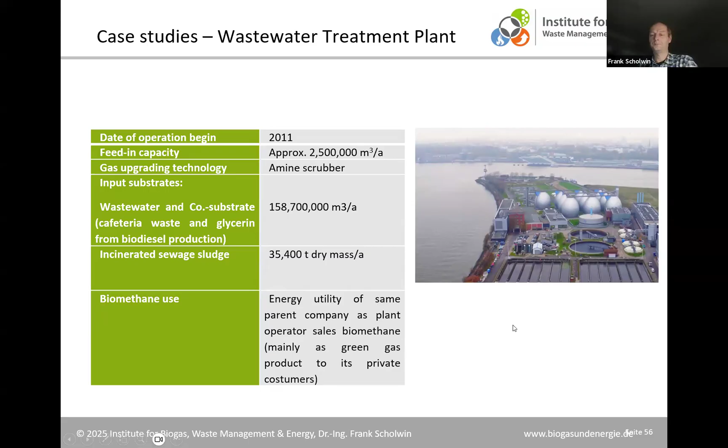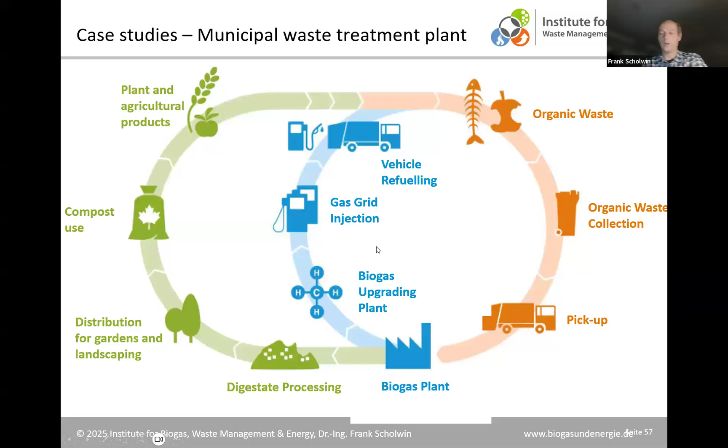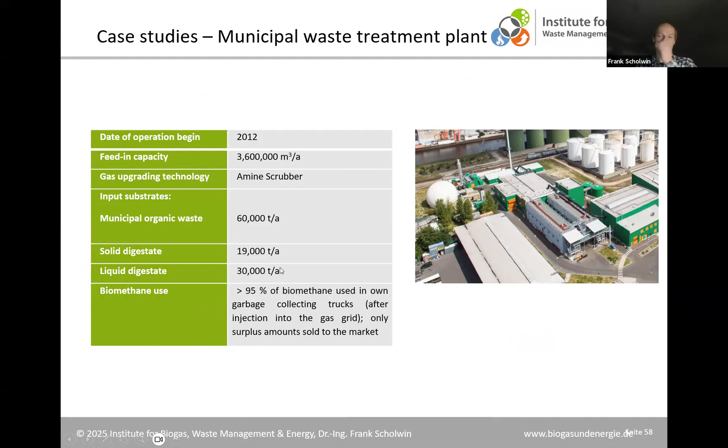Then we have a municipal waste treatment plant in Berlin, where we also have upgrading, with plug flow fermenters inside the building, so not much is visible from outside. Here 60,000 tons per year of organic waste are processed, and 3.6 million cubic meters per year of biomethane are injected into the gas grid. The digestate is then used as fertilizer on the fields outside Berlin.

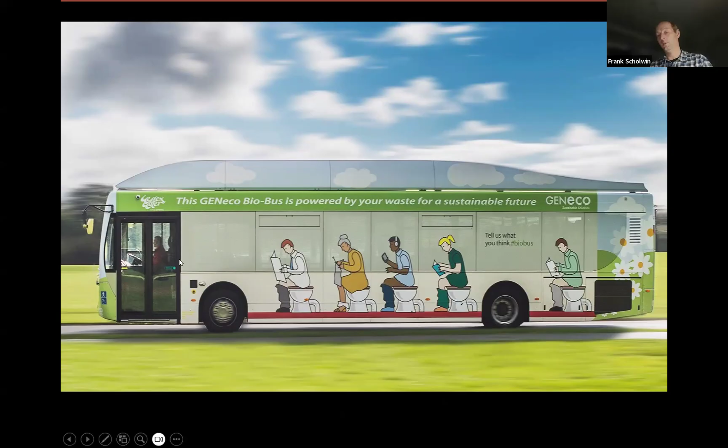That's probably a short overview. What is very important from my point of view, when you do such a nice project, is just to speak about it, to show it. This is an example from the UK, where a bus is powered from the gas of sewage sludge from the municipal wastewater treatment plant, and people see how it drives, which makes some common sense in the communities.

And that's what I wanted to give you an overview on now. It's got faster and faster, is my feeling, but I hope you catch most things. And I am finished, and we can have some questions here. I see some questions came up, and I hope you were able to follow. But the good thing is that you did record this, and you will always be able to check some information later from this lecture or this workshop I gave.

Thank you very much. Thank you, Frank. The last hour is always the most challenging. The sugar in the brains comes down.

So we have 2 to 3 questions. The first one is, does the mechanical mixing or pumping act like kind of an inhibitor for the biogas digester? No, there are no experiences like that, except when you have mixers which are turning so high frequently that they destroy the microorganisms. But that makes also no sense from the energy demand perspective, I would say. So typically the mixers are rotating quite slowly, and do not destroy the microorganisms, and then we don't see inhibition of the processes.